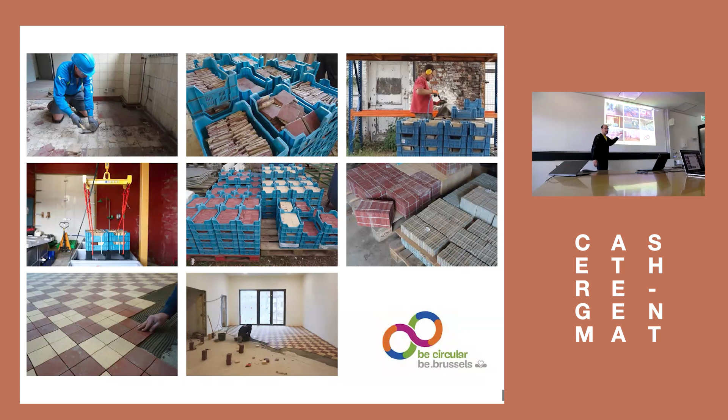We are spotted as a circular economy or whatever. It's true, it's really the work we do. At the same time, we are not using that label so much, or we're only part of a movement, but we have a deeper engagement with materials and the material flows in construction and industry.

I want to also share the dimension of materiality, hands-on thinking, but also the skepticism we have with people who address us. Because with this circular economy label, at the moment we are on the good side, but at the same time we still need to put into perspective what is asked to us.

Around 2019, 2020, I was invited to talk at a conference in London, the Architecture of Emergency, at the Barbican, and it was the poster. We were very skeptical about this whole idea.

So it was the big show, Barbican, big room. And actually we came up and introduced my talk with the fact that we were not comfortable, and we found that poster not inspiring, but that was a very inspiring poster of the moment.

And actually what is here is reuse tiles being placed in a multi-apartment publicly financed building. So it's kind of the impossible mission of today. They've gone through all the process.

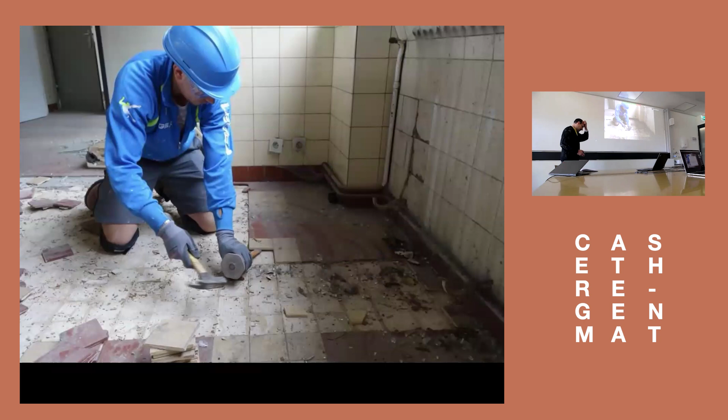Why the poster is relevant is because those tiles, to exist on the poster, they need to be reclaimed. And that's the work. For these tiles to be reclaimed, the decision to reclaim them was taken in that room, with the graffiti, the dust, and someone needed to feel and know: okay, under the dust there is something valuable, it's worth being done.

Today decision-making tends to happen at a table. But at the table it's very difficult. In the room, there's a bit of dust and a bit of engagement. It's not rocket science - still, you spend money, you pay the guys, you start to collect the materials, but you have something that you cannot reuse as is. You have cement mortar glued to the edge and those kind of things. So you have to proceed.

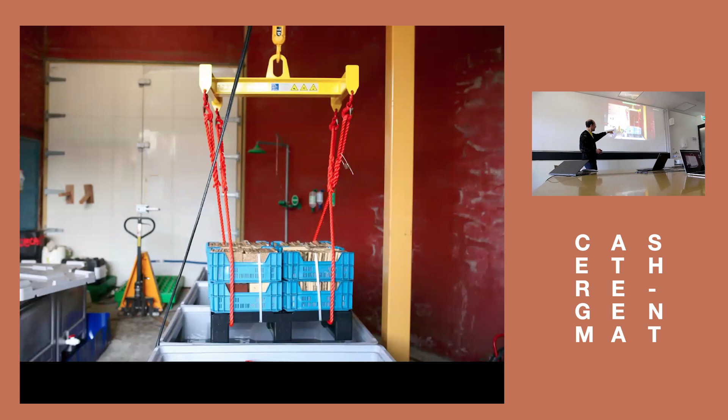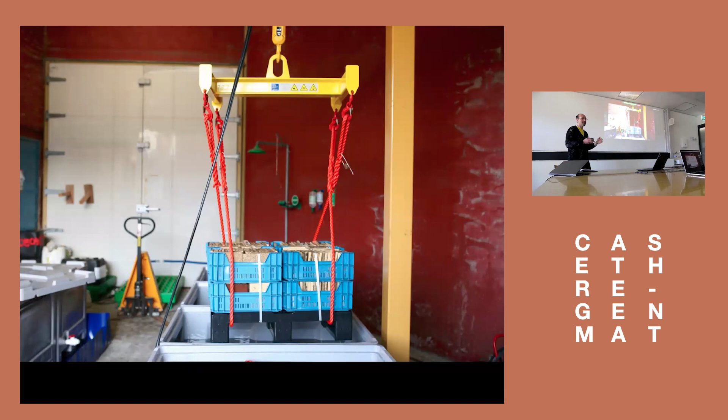You bring them out, and actually at Rotor we developed a capacity to drop them in a soft acid - basically it's vinegar, it bubbles. It's acetic acid diluted, it's white vinegar. And you leave them, and it actually dissolves the cement.

Because they are ceramic tiles that have been fired, they don't dissolve with the cement. You can high pressure wash them, and you can even recycle the water because it's not critical. And so you start to have a product.

When you start to have a product, then you can contemplate it. You look, and there are references and elements that you can start to associate to the things that have been done. And there is a culture that comes with this specific product.

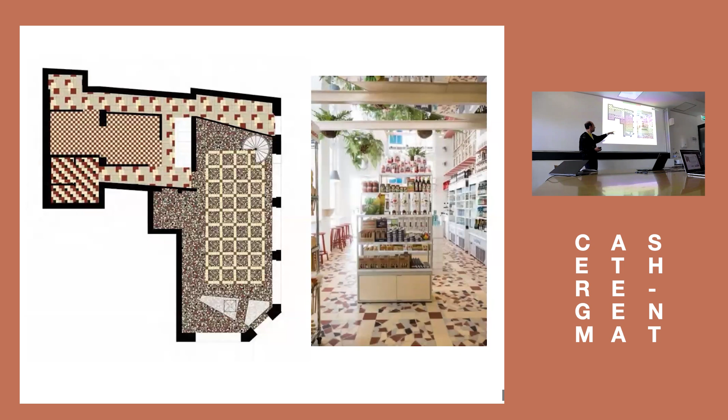Actually, they've been ordered and went through the whole documentation process, and they happen to be placed in apartment buildings in the Western world. They also happen to be sometimes used with the full creativity and spectrum of things. So we set that poster, and we associate it with the work of Opalis, which I'll bring at the end of the lecture—it's a network and inventory of people who practice or trade reused materials. That's more inspiring to start the day and change the world than the flooding of the Barbican.

In 2016, the Olympic Committee in Lausanne wanted to destroy and demolish their building. Some parts of the building were only 7 years old, but they changed their mind. There was a flood, so all the technical equipment had been changed 4 years before. It doesn't matter.

They wanted to destroy everything. That was the new restaurant and conference room, all new, very high-end Swiss quality architecture. So they knew they were in the spotlight as the Olympic Committee, so they created a construction task force and invited the best people in the world.

So EPFL knew they needed to call us. We came to the table, and there were people sitting in front of me, confirming that there was no reuse, nothing was to be reused—there was no need for that, anything in Switzerland. Everything was very sure and precise and confident.

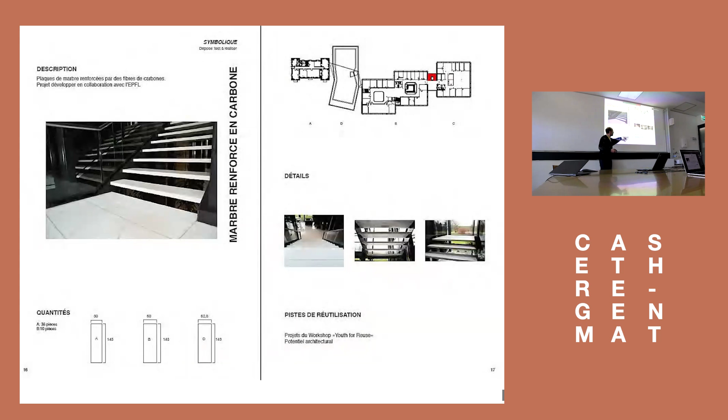And actually, we did the work, so we made an inventory of what we found. Like the reinforced carbon marble that was designed by EPFL 30 years ago. It's super nice, so it's just easy to move. We have a quantity and we can put them on the market to be circulated or given. And so on, the wash basin and all this collection of things.

And the students engaged also in looking for output. They started to make a list of all people that they could contact and that could be interested in collecting things, at least for free, or for this kind of organized exchange. That was impressive, it was beyond our expectation on the teaching side. We were just about assessing materials needs, but this showed real engagement and competence.

And actually, they found Promaison. They also found Materiuum, which is where I'm working at the moment. It's a kind of friends company association based in Geneva, already 12 years old, that echoes the work I did at Rotor. Since I'm based in Geneva now, I joined them.

And actually, the guy from Promaison came, he's based in Lausanne. They have a company that collects materials and brings them to renovation teams, maybe social housing or basically refurbishment between tenants in apartments. You need to make some fixture, you don't have a full design project, you can take whatever works and put it in. So there is a circle of ways to use materials in Lausanne, as in everywhere in the world.

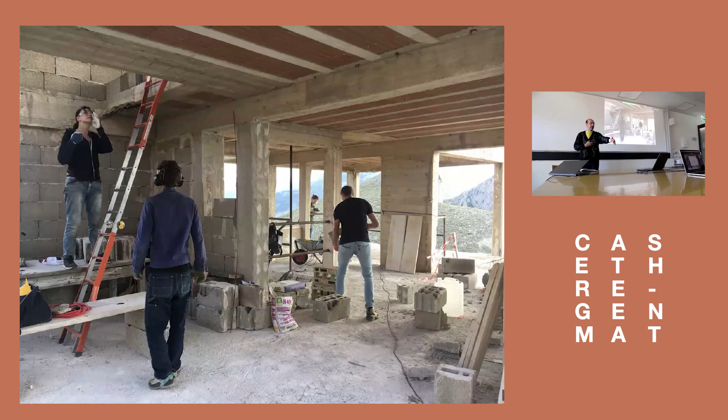So it happened, and we used the scaffolding steel elements to make some fencing — not like regulated public accessibility fencing, but staying 1.50 meters away from the edge. You already have that distance that makes the safety.

That was not the project. The project was to make access, so we needed to rebuild the road to that level so that an ambulance or whatever could reach the place. So a lot of work was like breaking blocks, like a prisoner, and filling the road.

We started — of course, this is the little stories, it's not the circular economy important stories, there was the one before. But we found marble in another room, so we collected it so that we could make a nice edge.

Officially, because, like I said, there is a kind of skepticism to what is asked, but officially the project became this one — on the contract, we only contracted that. It was a bench on the Belvedere where you can have the reverse view of everything, and the bench was given a view on the house.

It just happened that to get our mindset inspired, we touched that, but that was our gym. We were professional and insured, we could go inside. But the public project is that one, on the contract is that, the art piece is that.

The people can come, and there was a closed thing when the show was on. But of course, people went inside and they got the film. And that was this kind of physical part of the project.

I have the feeling you got the multifaceted nature of the project, and I wanted to share that. I've been a bit too long, but that's okay, we'll see.

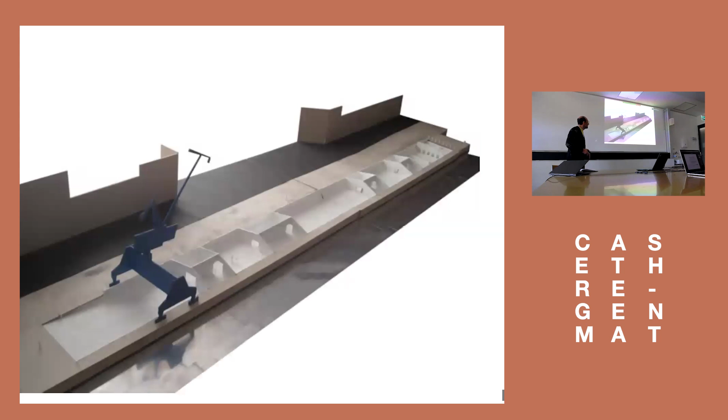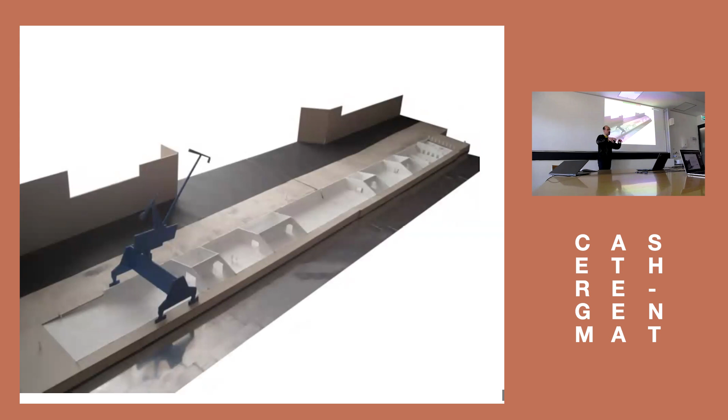It's along a canal. It used to be a container for sand and gravel to make concrete. A boat would be loaded, and then you'd load the trucks. Some designers and architects won a competition to turn it into a public space.

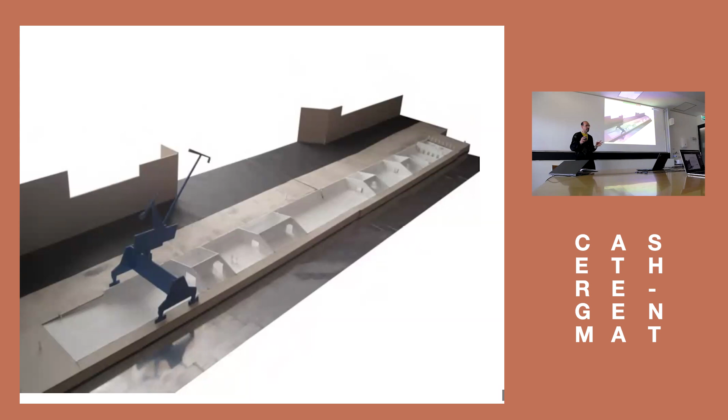They came with the proposition to paint everything white, for a new fresh beginning, and make openings so that it's accessible. And they called us saying, can you be the first artists or creative people to do something in the space? We had a 15,000-euro budget to do something.

We had the feeling they wanted us to bring something here, to bring some reused material, so it wouldn't feel guilty and everything would be good. And we were like, do we really play that? Is this what we do with our life? Does it make sense? But we looked on Google Street View, and actually the site was like that.

There was water there. That would be kind of intriguing. And we went there.

And actually, we were turning around and just explaining it happens that at Rotor we have a kind of genuine interdisciplinarity, by the fact that we are a team of people who are available and engaged for the material flow in industry, but with different backgrounds, because there is no specialty for the work we do. So if you have a friend that is wise and smart and available, you engage him on the work, and so we have a team of very different people.

One of the colleagues is a biologist, and he said, Tristan, Renaud, come. If you give me a moment, I will tell you when the first Chinese boat came here. I said... he said, no, because this weekend I know it, it's this bacteria from China with this mushroom, and they grow this speed, so I can calculate, and it means that the bacteria was there, and before it was not there, etc. We were like, wow.

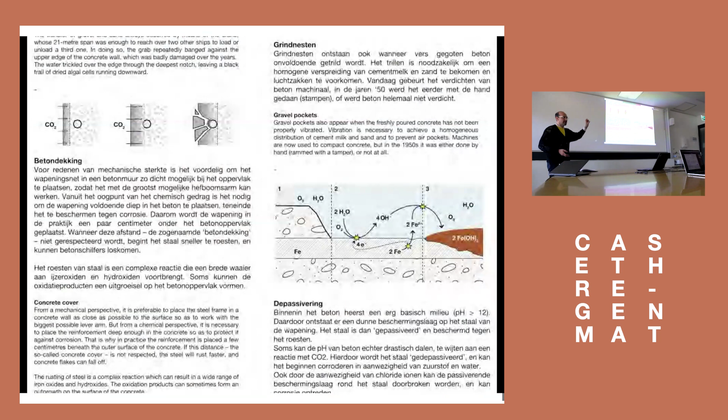And we proposed to make an exhibition of what is already there. So we made it seriously. We have a very descriptive explanation of what happened there. And we created this kind of space out of curating what is there. Of course, the graffiti was a subject, the concrete story was there.

It allowed us to have this lady being very interested suddenly about the brands of spray can that the guys use in the thing. And of course, the plant was saved, and the story of the green roof, the promotion of this plant was mentioned there.

So that was it, that was... Again, I believe that the thinking of that project and the confidence in taking the project around what is expected from us come from this material engagement. It cannot come from you deciding that it will be cool to work on that project. It just happened by arming yourself with interdisciplinarity, collective thinking, collective capacity, dialectic to test, and then it's not rocket science.

I'll take another project. It's also an interesting mechanism of working, so I also reveal that because you are engaged in professional work, the requests are also sometimes a bit constraining.

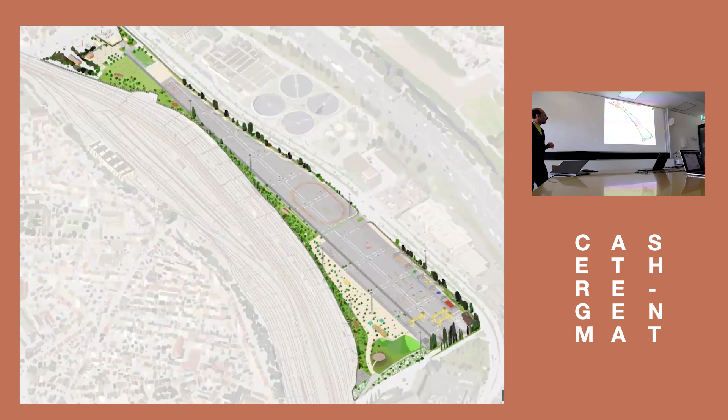Basically, we were called by a big engineering company that got the contract as design and build to make a parking lot here. That site is actually next to the biggest event hall we have in Belgium, the Sport Palace in Antwerp, and they are building a new parking. So for the next 9 years, they needed a big parking as temporary use, and they received this space from the train infrastructure to make the parking for big events to happen.

And they contacted us and said, can you do the 1% of artistic contribution to the project? Okay, and the guys in the team, they are not the boss, but they kind of pushed for us. They were genuinely curious about who we are and what we do. So they were kind of giving us some freedom and said, can you do the 1%?

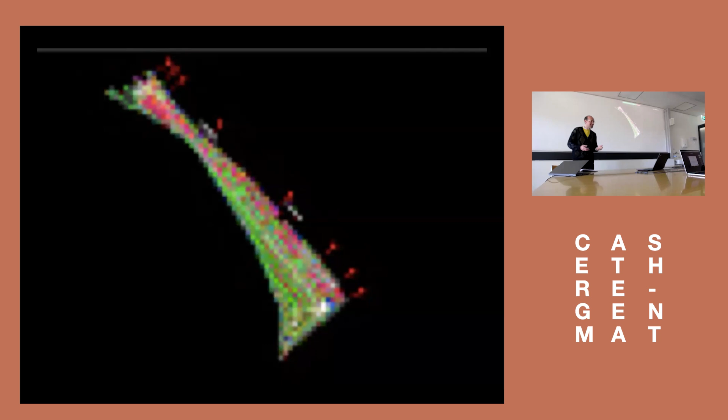When you work with this design and build engineering company, that's the plan and the materiality they have, and that's how it's developed. Okay, actually, the truth is they never bring the image, they work with this one. Everything is designed and calculated and then tested and they come with that.

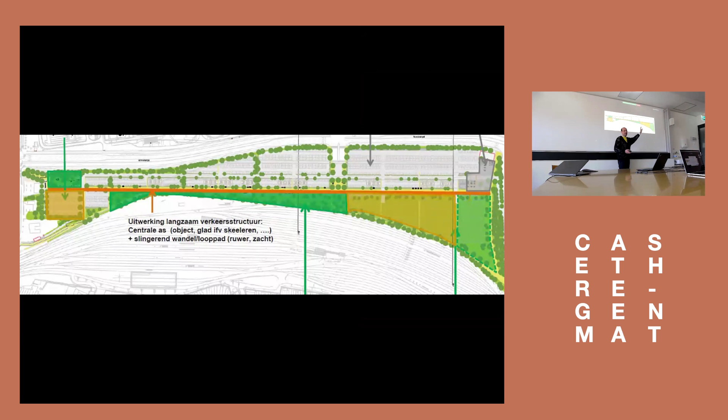So that's where the meeting starts. To be honest, they have a plan - it's this one, full of trees, but in 9 years there will never be trees. So it's a kind of illusion plan. But we were there to work with them, so we engaged in their game.

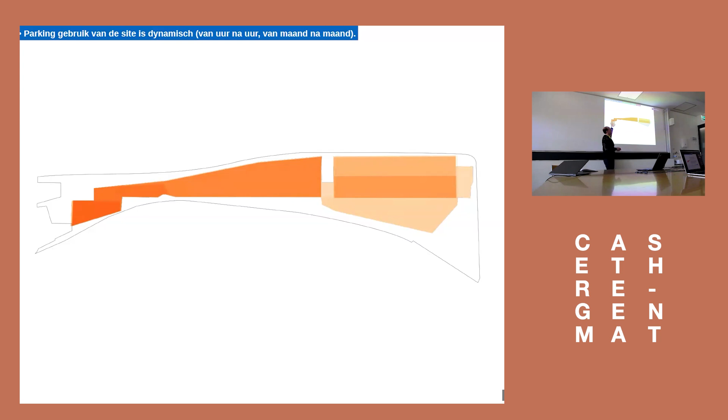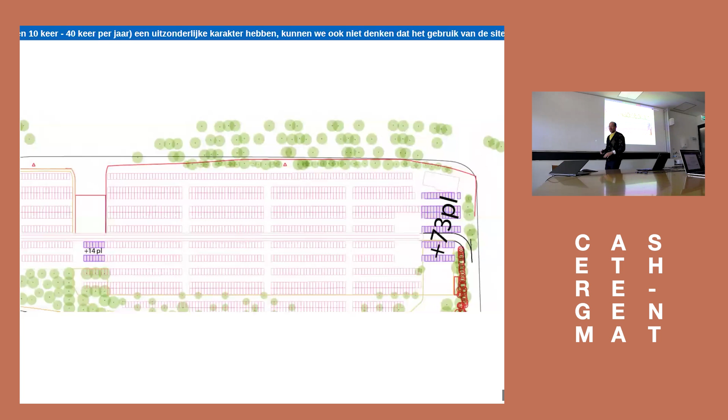So we said, let's first look - we have a parking, can we have a conversation about this in a dynamic perspective? Because not every day Madonna is coming in town and you need to fill it. Some days it's just people working in the building and they'll park in this area. You've put that much space of parking in your project - let's play your game. Actually, you lost 14 places here, and actually in this area we can still put more places, but in exchange we want a differentiated conversation for this area.

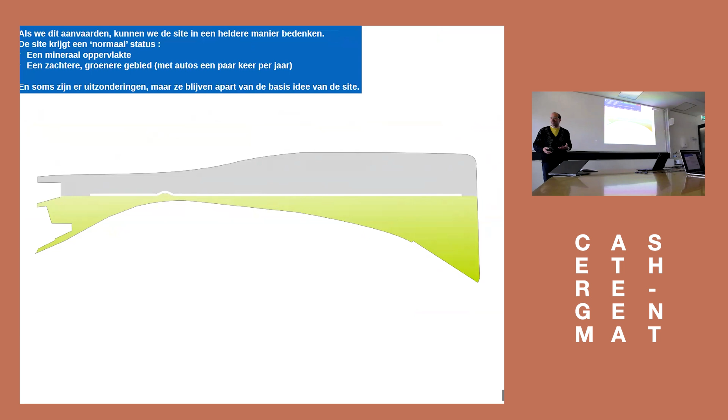So that we can start to have maybe a schematic idea of the space, not only as a parking, but as a schematic of something else that is a park and accessible for the population surrounding the site.

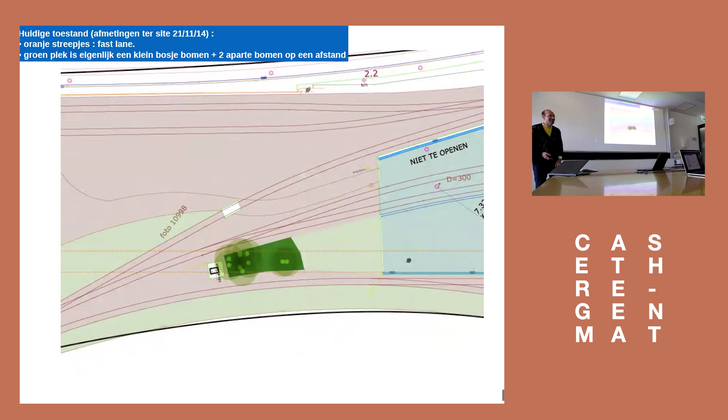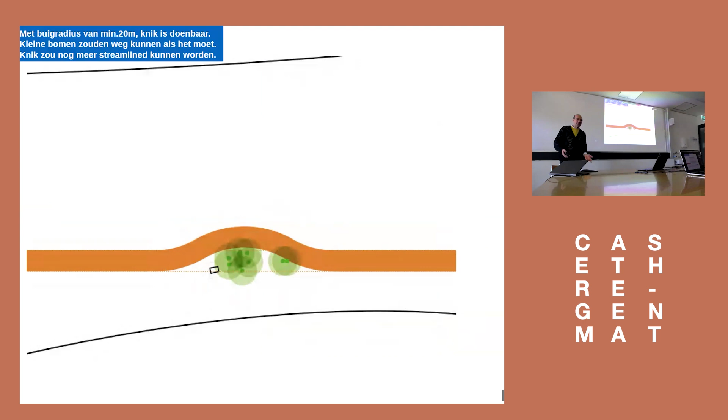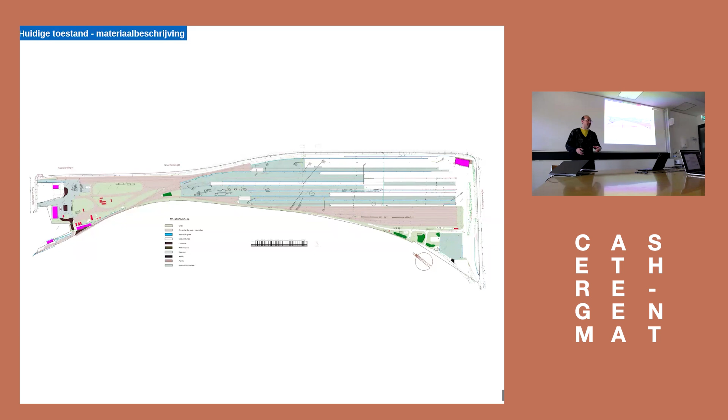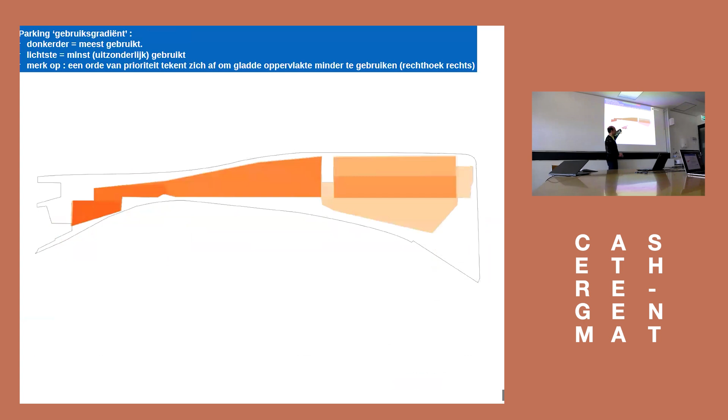Next step - there is a map that describes all the materialities of the site. They just wanted to remove everything and do the concrete blocks, but we said, can we look carefully about the different quality? If we highlight the high quality materials, we start to have a focus. And if we bring the dynamic perspective into the story, we won't bother you with this quality material, but can we talk about these materials that have qualities but are not in the highly used space? Can we do a project about that?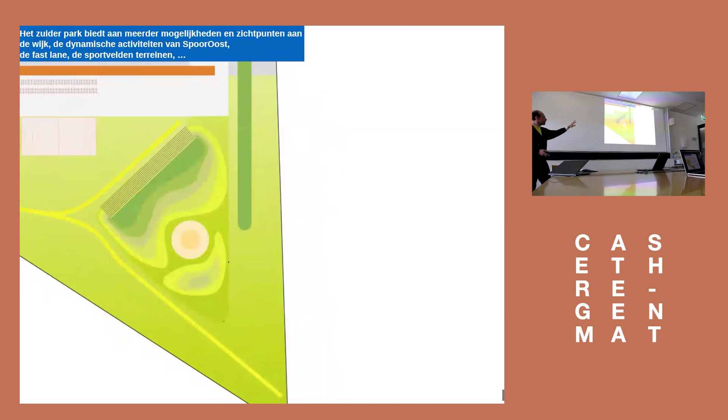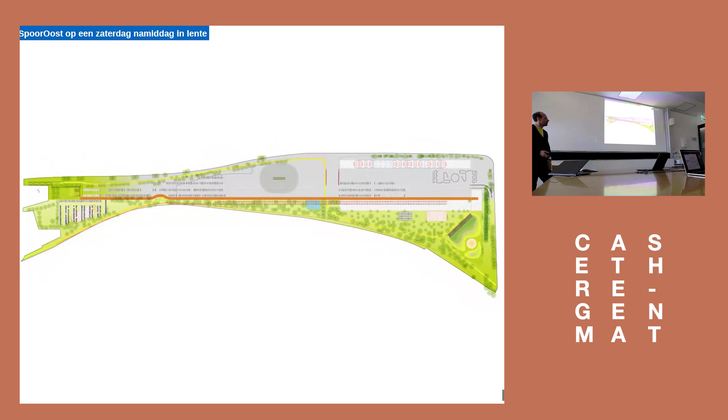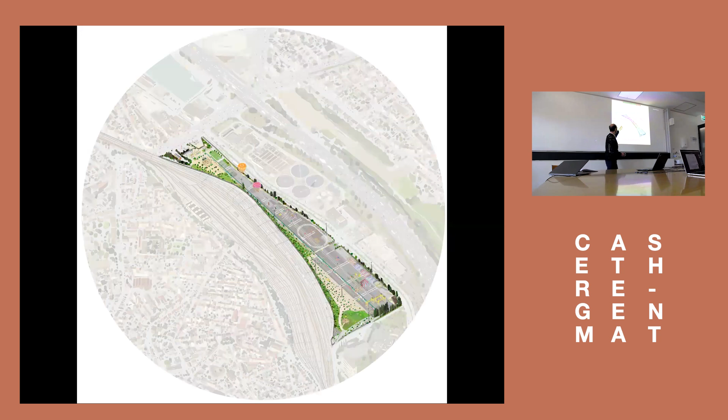Okay, they agreed, so we captured that part of the project to be something, and it started to be a painting we could display at the entrance of the site. We said we could add the hypothetical trees if they wanted. And actually it happened - they did it, the playground is there, kept in a different treatment so cars can park, but it can also be a park - the field has been there. And so the painting was there, full of life, and that was the commissioned work that we had.

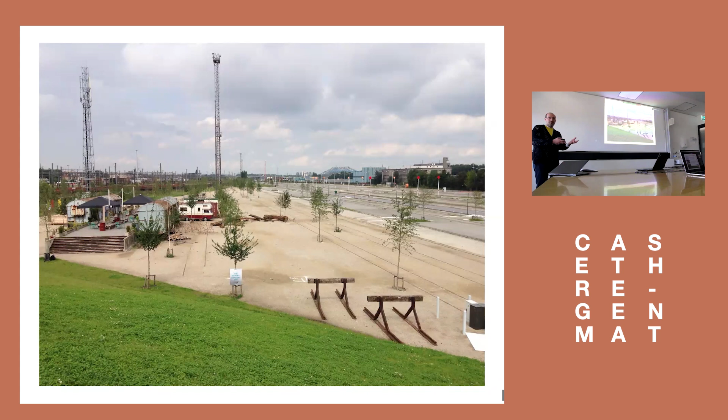It happened, it became something, it became nice to be used. It was mostly done out of nothing, out of what was already there, but arguing for the kids' playground. Of course, the 1 kilometer line was made into something special, and the trees have been made into the project.

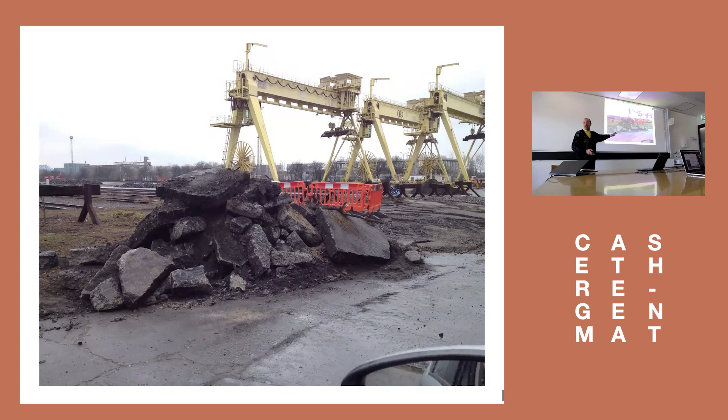There was also a little reuse element - they were collecting these materials. It was impossible to put any reuse in the Excel sheet, it was forbidden for the project. But actually it was just there, and we happened to be on site that day. She said, can you not drop them on the side in this kind of landscaping way? So the guys did it - no one goes against common sense.

So it happened, and I actually have a photo. It's not here, but when it's green, it's so beautiful - it's reused landscaping. Okay, I keep going to the next stories. I don't know the timing either, but it's totally okay, we still have 20 minutes.

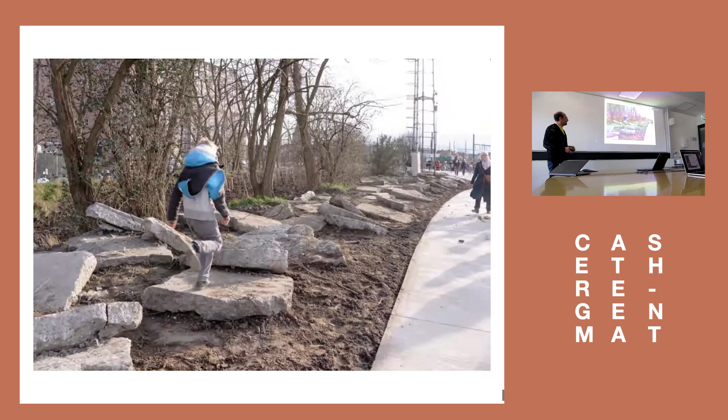It's a bit of a similar story, but it gets us closer to the reuse profession, so I'll take it too. It's still kind of in the creative periphery of architectural and urbanism projects - okay, you agree, you go with me on that. So it's again a workshop, we took the platform.

It's in Vienna, at Nordbahnhof. Around 2018, 2019 there was a huge urban development, transforming a wide area into a new city, like they did in your project, but from nothing. The people in charge of urban planning, and people living nearby, really loved the site.

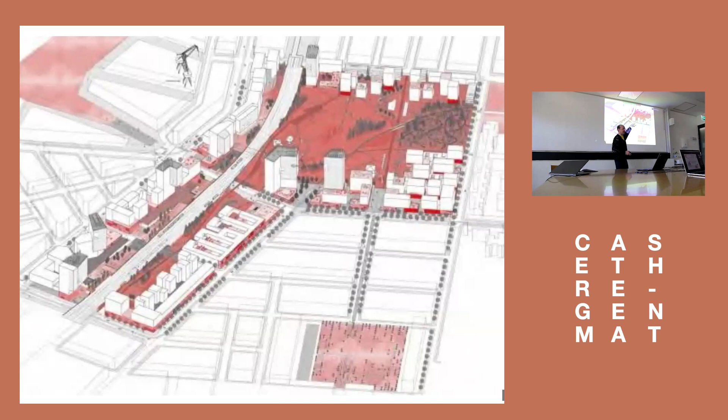It was wild next to the train station, and they called it wilderness - they really enjoyed the quality of the terrain vague, this kind of place in the city. They won the competition suggesting to have high-rise, which is not often in Vienna, but in exchange for the densification, to keep a large area as wild in the drawing. So it was going to happen.

The thing that started to happen is that the city management said, but we have park management that needs to be in charge of every open public space in the city, and they don't know how to manage a wild area. They need a trash bin every so many meters, they need benches, they need to clean it every 4 days, etc. They don't want to manage your proposition, so they try to turn it into a forest, because in a forest you don't have those management requirements.

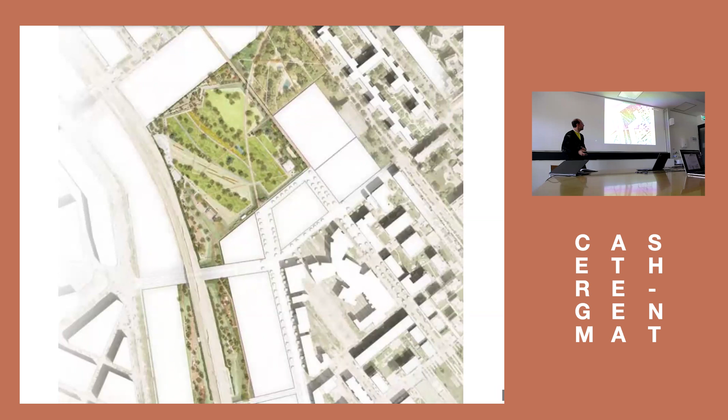They called us for professional contribution, and gave us 2 weeks with students from the social design art school in Vienna, which is a very nice school, the Angewandte. They said, can you help us reveal, in a very high fashion, the qualities of what is there in the wild, so we can say it's relevant to keep it? Can you value the materiality of these things that are so precious to us?

Okay, you lose that when you go against it. And okay, it's not safe, but maybe the fence that you put up could be turned to make a pedestrian path and just reinforce the need for pedestrians and make use of it. Okay, you lose that. Or there was some access on the site, and we could clean it and trim it in ways that show those places are nice - okay, the skate park, and that was the thing.

Interestingly, also, once we spent time in the space, we discovered there was a biotope, and there was a pond that was made by the inhabitants for lizards.

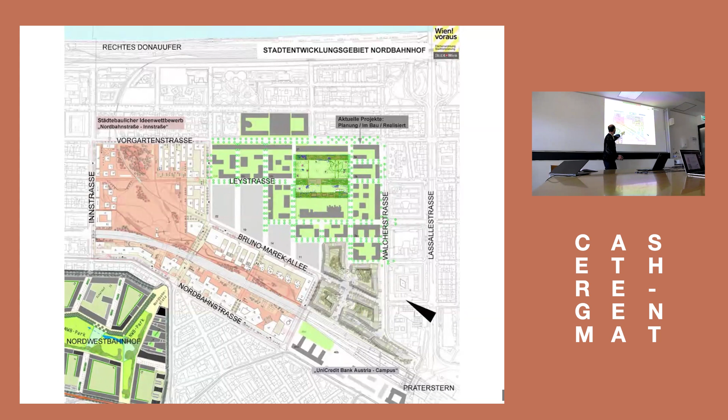So we turned the workshop into two teams. Some were working on site, and some others were using two cars and going every day outside of the city to meet companies who could...

source reuse material for this kind of project. So we went to traders of materials that are not new, and they exist. They are hidden, they are small companies, we'll come to that, but they exist. So we went to Antique Stein, we went to Alt Baustoff, we saw a guy who was specialized in selling bricks, we found companies who trade reuse cobblestone, reuse tiles, all that is surrounding Geneva, Vienna, sometimes quite far, but we could do it day by day.

It's a very good company, it's a specialty of those guys, they can do that, and they develop use cases that are convincing.

So we did that background work, but on the site, we decided that our project would become to draw the urban planning line in real life, one-to-one, to reveal this ambiguity of these two questions: what you would lose, but what we can find for you for a new urbanism and a new movement. So we painted the line all around the site.

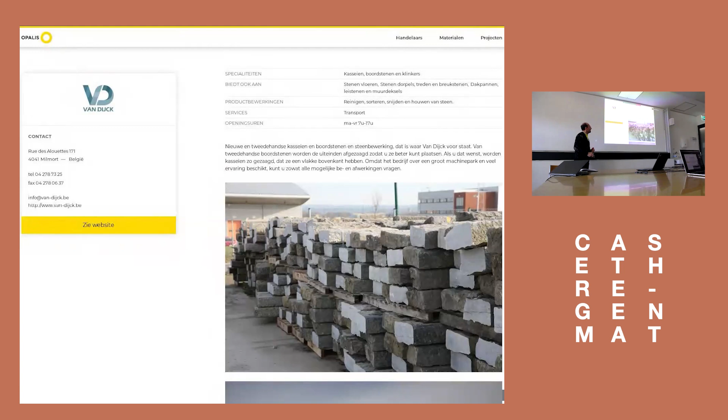There are different typologies of company. Normally I could give a whole class about that, but we'll just take one slide. First, age of the products: most companies are close to antique for common sense, good reason, but some trade contemporary products. Some companies are sole traders, very small; we're speaking about 15 to 20 people, not many, so small to medium companies.

Regarding the preparation of building materials, you have very light preparation, like demolition companies that just collect materials so they can give them away or sell them on the side. Then heavy cleaning and technical documentation, like old wood turned into sophisticated wood floor. We are a bit in the middle with the common thing. There's various typology, you'll have the slide to read.

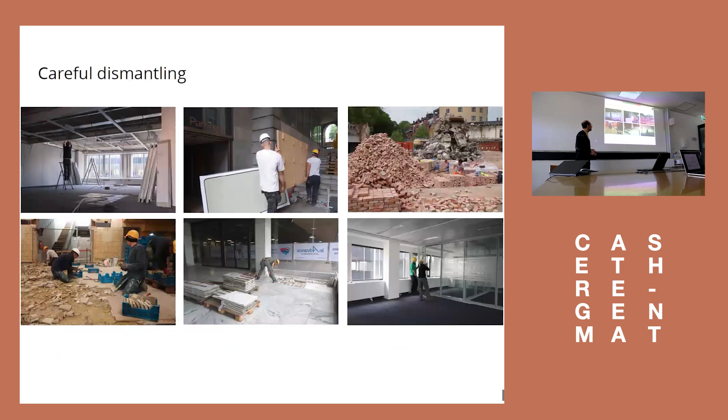So there are companies who do careful dismantling. There are companies that do lightweight treatment of materials into elements. That's highlighted here, and they do storage and keeping to adjust to market demand.

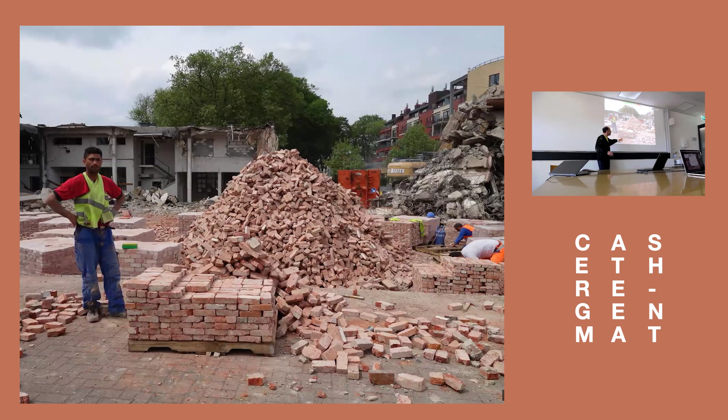Just to give an example, Frank is a company in Belgium specialized in bricks. That's their facility, and actually this is reclamation of bricks, 4 years ago in Western Europe, in Belgium, in Brussels. That's how it's happening. They deliver the capacity of one house every day. We use brick, mostly on old-fashioned houses, but also in contemporary projects.

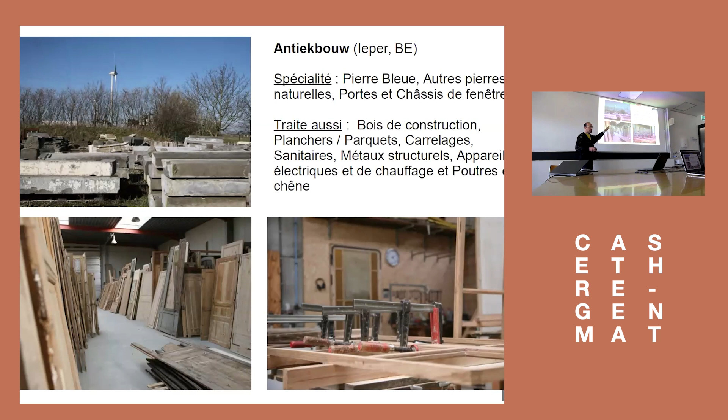Another one is Antiekbouw. You see this kind of antique junkyard collection of material. It happened that when Philippe Samyn won the competition for the Europa Council Parliament in Brussels, he wanted to do a facade made of reused windows coming from all around Europe, in theory. The company who did that is Antiekbouw.

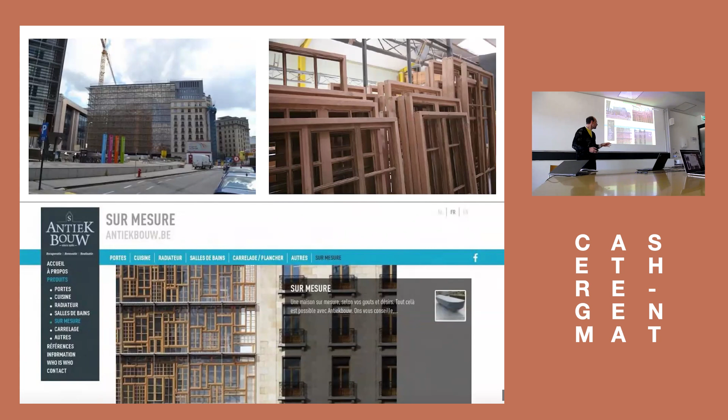There wasn't really a reuse professional, nicely designed company who does that, so the best option was to contact them and build up the project with them. With the investment, they could scale up a little bit. And today you have on their website the advertisement of a very sophisticated facade, the facade of the European Council. That's interesting, to land it down to earth, to know that.

On the Opalis website, you'll also see a catalog of references—projects that achieved having reused components in their project, so you have the links with what is there. We started with Belgium.

As inside of the project, in the last 4 years we've been able to get European research grants, Interreg, with several partners to cover UK, Netherlands, and part of France, visiting more than 1,500 companies. What we love about this is that they are not NGOs, they are companies, economic actors, so they fit the full equation of our economy. They don't trade everything—they're about 1% of materials reused through this kind of channel in our society, but at least what they do is checked by all the criteria of economy.

So it's a starting point, like you did yesterday, starting from something not speculative. And actually, they have their hands engaged to be these experts, and to the work we do, a bit as facilitators, they are the experts. They are our contacts, our experts, and our friends—even though sometimes they are very strange people.

You have far-right people living in the countryside with very strong opinions that don't align with the work we do. Some would never accept speaking about sustainability or whatever, saying no, we don't sell those kinds of things, we sell old precious materials. But we don't mind—we want things to be recirculated, reused, and we want to build up your expertise. So we know where the focus is, and we have reason to get acquainted.

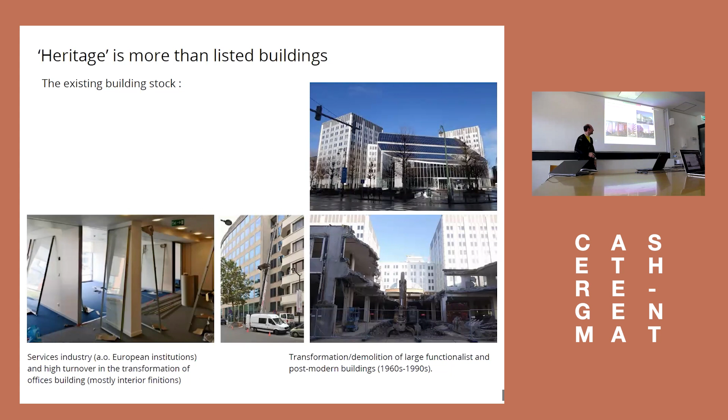You all know the thing. And actually, they engaged with us because we could speak their language, and they explained that for commercial office space, the practice in the Western world is to take it raw in concrete casco, and then you put in your own interior because you want your corporate identity to be in control.

When you scale up or move, you need to remove everything so that the next person can come in. The occupation period is short, about 25% is less than 3 years, and most is less than 9 years. So this practice means you have flexible design for deconstruction of materials used between 3 to 9 years, put in the container very fast. Because the rent price is so high, they just need to be fast.

And that's what happens around us. They said, okay, we have this building, it was built 9 years ago, it was the headquarters of Levi's in Belgium. We will remove everything inside before the next guy comes. Can you do something? It's okay, we have no choice, we have to go with this.

But what is reusable when you engage yourself in an economic term in this world? Demountable cannot be the definition of reusable, otherwise you collapse. So we needed reusable to mean: when the cost of dismantling plus handling, multiplied by a risk factor, is less than market value, if this equation fits, you can engage. There is no reason not to do it. You just need the capacity, the willingness, the opportunity to talk with the good actors, and the capacity to reassure them that it will be done professionally.

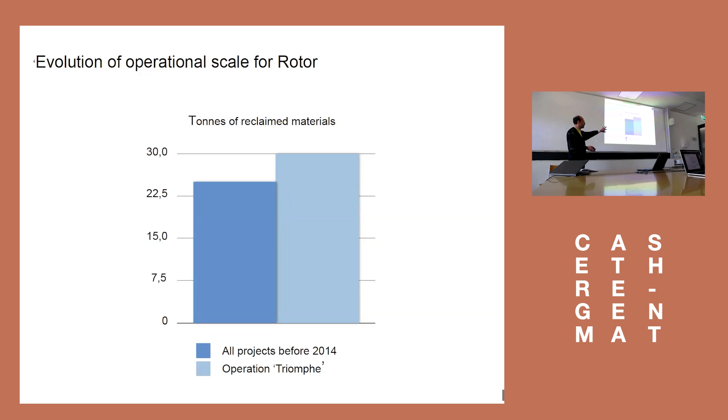But actually there, with the thing I just showed, in 3 weeks we had saved 30 tons of materials. So you are faced with this idea: do you do 25 tons in 9 years, or do you do 30 tons in 3 weeks? We had no choice but to shift all our energy and focus, even though we would not remove the other capacity because they are slightly different, but we need to commit to the 30 tons every 3 weeks. So we did, and that's when Rotor deconstruction started.

To share the thing, that was the second building we did, it was General Electric in Brussels. And we did a kind of conservative CO2 estimation. So we worked the quantities, we led the conversion. This is a kind of polemical thing, so we did not highlight it, but with some conservative view, the 3 weeks saving 25 tons of materials is the equivalent of 9 rounds around the world in a car, that was saved in those 3 weeks. It's also equivalent to 70 square meters of photovoltaic panels over 25 years.

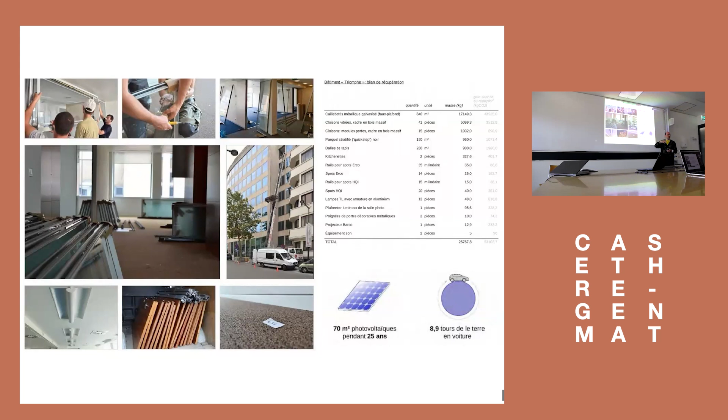So in 3 weeks, we had the same impact as all the noise this developer was making about their promotion of their headquarters with the photovoltaic thing. They understood that. Befimmo, one of the leaders in Belgium, started to publish sustainability reports following the collaboration between Befimmo and Rotor. That was another building, 10 tons of building material. We were very happy to note, to emphasize what I just said, they are listed on the stock market, this company, so they need to do an annual report. In the annual report, there is an environmental achievement section, and it happened that the gray energy benefits from the work they did with us, or similar actors when they could find some, was coming before the photovoltaic effort from the portfolio.

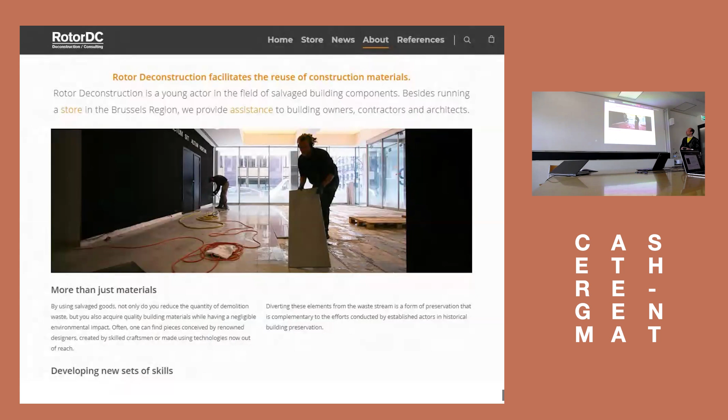So they understood that it was relevant and there is a topic here. So we created Rotor Deconstruction and we kept doing that. We have a showroom that trades the materials we can collect that have enough value, and there is a shop online. Now there are 15 to 20 people selling and trading these materials every day.

Can I ask, is the price still less than market price? Yeah, if it's sold here, it starts to be a bit of a luxury because there is a niche, so you're able to finance activities by trading materials that some people buy. So they start to be too expensive for me.

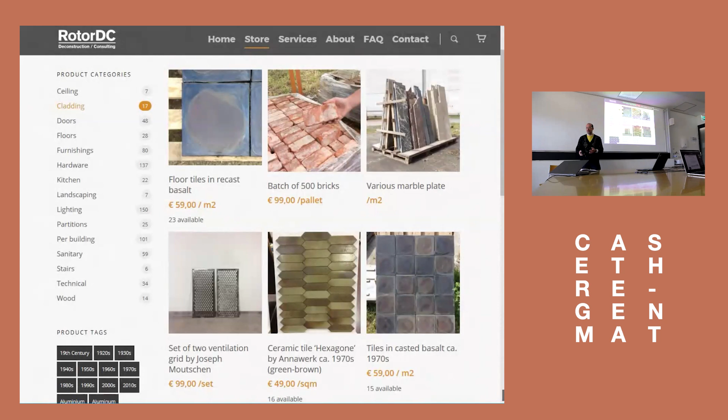All this is kind of still a pilot transition project. Still, it's happening. For me, it's 10 years old now. And I think it will be the conclusion.

Soon after we did those few buildings, we were invited to work on this one. It was the headquarters of a bank in Brussels, very big, nice building. You have very nice interiors designed by Jules Wabbes, a known interior designer. You have granite with patterns, precious wood. On the ground floor, you have this very nice false ceiling that hides the lightings.

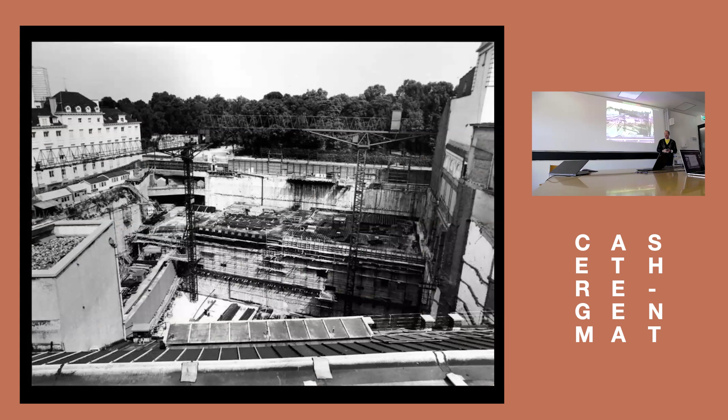So you want to engage in the bigger operation of reclaiming. That's where we rented a warehouse, because the materials were rich enough to be collected and gathered and waiting for some time. But actually, when you go into that building, it's 6 floors below the ground—it goes below the water level of the city, and there's a metro line going through the basement. So if you do something stupid in the building, before you know it, the metro process is flooded, and it's your guilt. So it's not just about going and taking what you want.

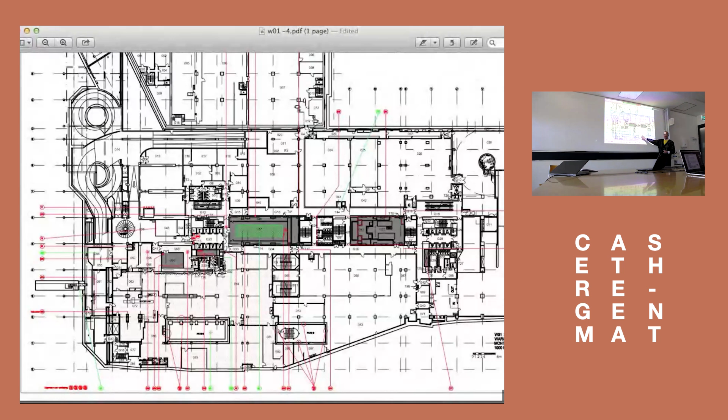Basically, to organize the operation, there is a kind of reverse engineering. That's the plan you need to use—basically it's the same plan as the project development. That's on which one you work.

And you have to be aware of the capacity of a building, because the beautiful granite stone that you find, you can put them on a pallet and pile them, but it suddenly becomes very heavy. And then you roll with the transpallet, you go. But actually, if you look at the floor capacity, here it's 500 kilograms per square meter, but here it's only 120. So you don't bring your pile of stone there and—poof—the building collapses.

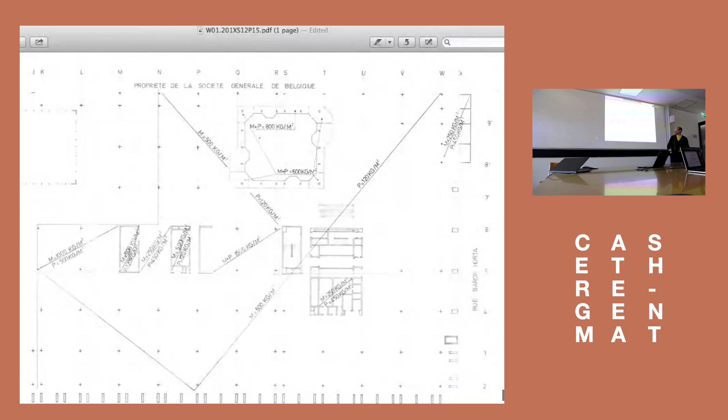And you have to be aware of the capacity of a building, because the beautiful granite stone that you find, you can put them on a pallet and pile them, but it suddenly becomes very heavy. And then you roll with the transpallet, you go. But actually, if you look at the floor capacity, here it's 500 kilogram per square meter, but here it's only 120. So you don't bring your pile of stone there and—poof—the building collapses.

So you need full awareness of the skills we have. And that's where I wanted to bring us back to the professionalization of this question, and the reason why we are relevant in engaging with this question. And of course, there is the very dramatic question of pollution in construction.

Here is kind of asbestos, not exactly asbestos, that is highlighted. We only proceeded after the pollution diagnostic was reasonably done. Of course, you should never try to reclaim materials next to danger like this. The health and your safety is more important than the material and the CO2, whatever. And if it really needs, for some specific reason, to be done, it needs to be completely carefully done, and it's very expensive.

But I wanted to show you—here are three of my colleagues, Michael, Martin, and Daniel. They would be like me giving lectures and teaching, but another day they dress like they need to enter the theater, to be able to make the decision and make it happen, so that this kind of work and this kind of decision can be made reasonably. And so that's kind of one engagement.